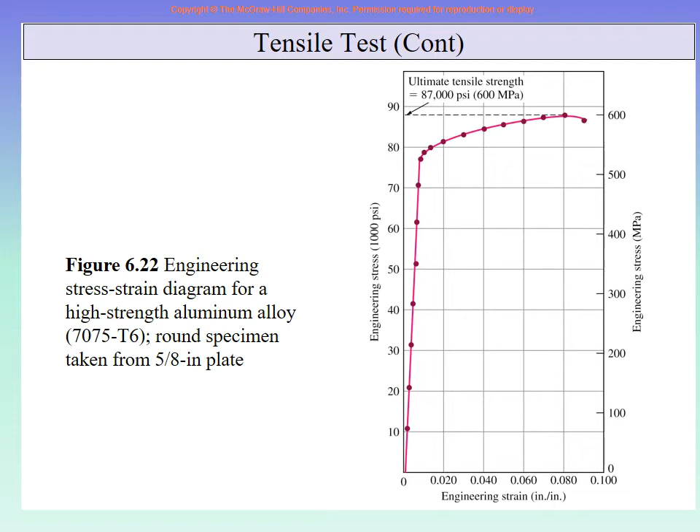Of course, this is a high strength aluminum alloy. If it was a lower strength aluminum alloy, there will be more strain. Here it is fracturing before 0.1 strain. 0.1 means 10%. So it is fracturing before that point, but other metals can go to 0.3, 0.4 strain before they fracture. So now we will start the mechanical properties from here.

The first mechanical property, and you know that you had earlier Hooke's law in your earlier mechanics. This is not Hooke's law. Hooke's law was force and deformation. You had F is directly proportional to x, so F is equal to Kx, where K was the spring constant, remember, the stiffness of the material. But now instead of force you have stress, and instead of delta L you have strain. So it is a stress strain version of Hooke's law. So calling it Hooke's law is not right. Hooke's law was F is equal to Kx. Now the law is sigma is equal to E epsilon.

This is in the straight line region. If there is a straight line, there is a slope of the line, right? In the vertical axis, remember, there is a stress. In the horizontal axis, there is a strain. So at any point, if you take a triangle, lower point, upper point, make a triangle, then the vertical side of that triangle is the stress and the horizontal side is the strain. So if you divide stress by strain, you get the slope of that line.

That slope has the symbol E, and it is called the modulus of elasticity, or the elastic modulus, or the Young's modulus, named after the scientist who discovered it, right? So modulus of elasticity, elastic modulus, or Young's modulus, all the three are just the slope of the straight line region when we are doing tensile test of a metal, and the straight line region for metal means elastic region. So therefore modulus of elasticity.

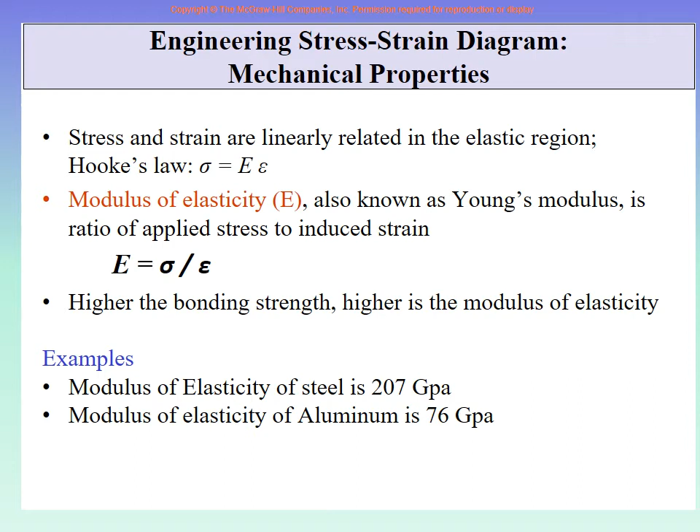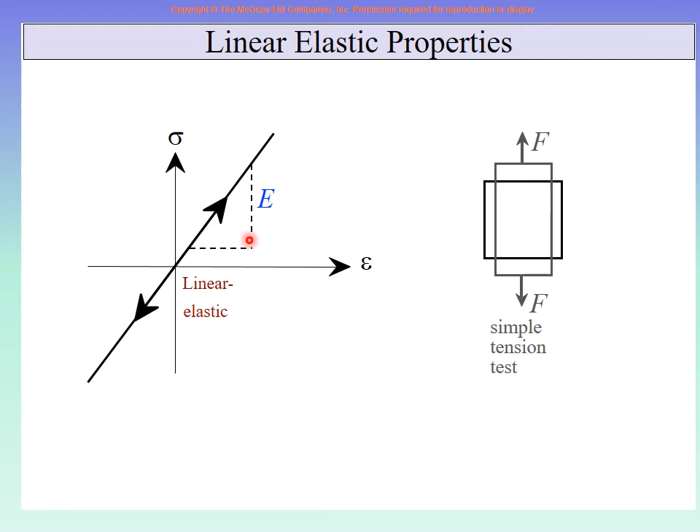Okay. So modulus of elasticity is the first material property that we can derive from the stress strain diagram. Okay. So we are just again explaining to you that the original piece was this, the length was changed, we plotted the stress against the strain, we take any 2 points, then the stress here and the strain here, this ratio is the Young's modulus or slope of the material.

Here this is from your book, or if you have the Callister book, it is from there. I like these types of charts, they are brilliant. If you have this page when you are in the industry working in the field, then it would be great. Again, on the vertical axis you have the values of E in gigapascals, right? And this column is for metals and alloys, this is for ceramics, this is for polymers, and this is for composites, the 4 basic material types for engineering.

And then tungsten, molybdenum, steel, titanium, platinum, copper, zinc, silver, aluminum, magnesium. In ceramics, graphite, concrete, glass. In polymers, polyester, PET, PP, HDPE, right? So this is a brilliant table. On one page, you have the Young's modulus of all the major engineering materials, and you also know that the Young's modulus of ceramics is perhaps the highest, of metals is only slightly below, but it is still very high.

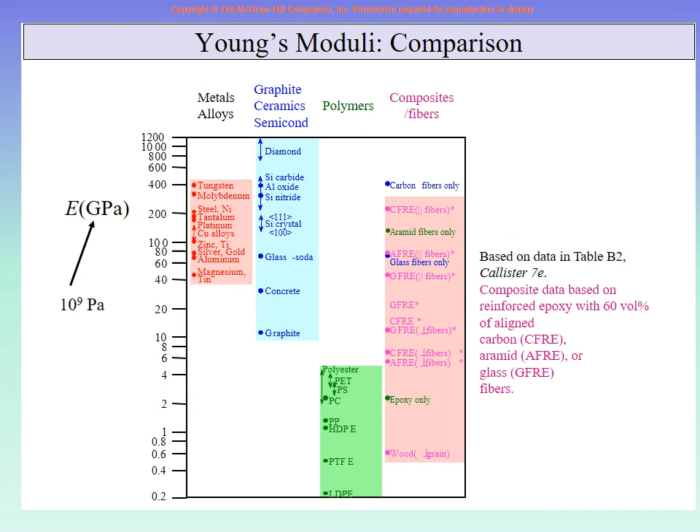The Young's modulus of polymers and plastics is very low. Composites are things that we design, we make them by mixtures. So from very low to pretty high, we can moderately do it. So if this type of chart is available to us, then we don't have to look at a lot of tables for metals separately, for ceramics separately, and so on.

The second material property that we want to get from the graph is the yield strength. Some of you already know the name because of your earlier courses, right? It is the borderline between the elastic and the plastic region. That is what is written, you can read it. Where the straight line region ends, that point is the yield point, because after that the curve will start. Or you can say where the elastic region finishes and the plastic region starts.

Now, why is it called yield? I always have this in every course, that if the words are there, they have a meaning. So forget about material science. What do you think is the meaning of the word yield in normal English? You have done a full year of foundation with English and so forth.

Yes, one of you answered that if there is an agricultural field, then how much you produce is called the yield. So you are right, that is one meaning of yield. There is a cotton field, a wheat field, a rice field. How much you produce is called the yield. What is the other meaning of yield in normal English? Yes, if I put some pressure on you, political pressure, if you resist it, you do not yield. But if you cannot resist and you agree to the pressure, you yield. So to give in to the pressure is called yield.

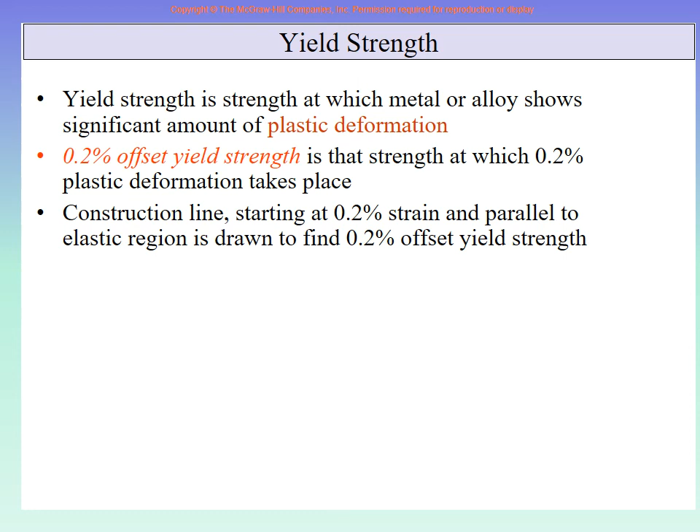So here, until the end of the elastic region, the material was resisting. As soon as you remove the load, there is no deformation. But once this point is reached, the material has yielded. It has gone through a permanent deformation. Now even if you remove the load, it will not go to zero deformation. So yielding means you applied external pressure and now the material has permanently changed. So the meaning of yield is correct.

So here in the graph, if there is a very standard end of the straight line region, then we find that point. But sometimes it is very difficult, it is a smooth curve, so we cannot find where this point is, which is otherwise the yield point. So what do you do? On the strain side, you see 0.2% strain, which is 0.002. You mark this point, you make a line parallel to this, and wherever it cuts the curve, there you find the yield strength, and you call it the 0.2% offset yield strength.

So either the yield strength is very clear at the end of the straight line region, or if the curve is very smooth, then you use a 0.2% offset yield strength, and this is the end of the elastic region and the beginning of the plastic region. So one more material property.